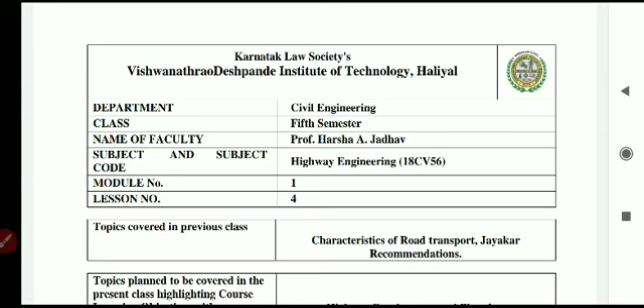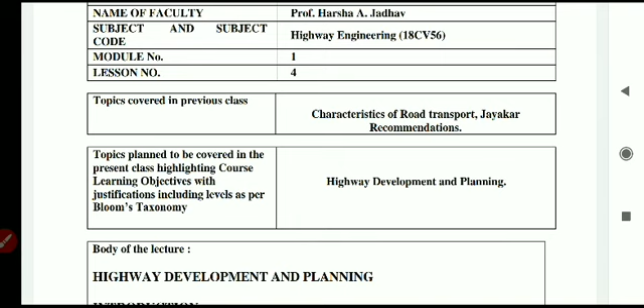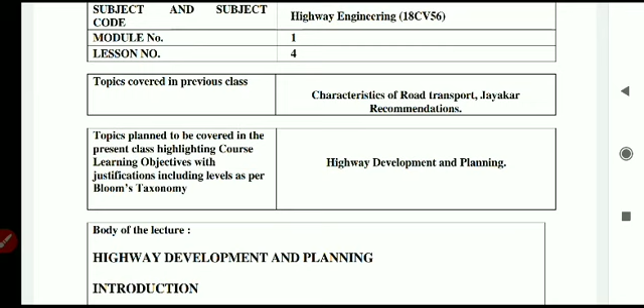Before commencing the fourth lesson, I would like to brief out whatever we discussed in lecture number 3, last class. We discussed characteristics of road transportation, about 6 to 7 characteristics. I explained door to door service is a very important characteristic which is not at all available in any other type of transportation.

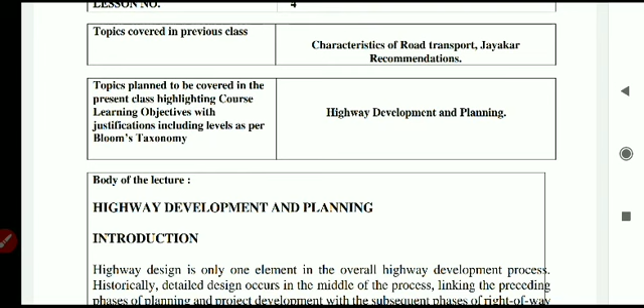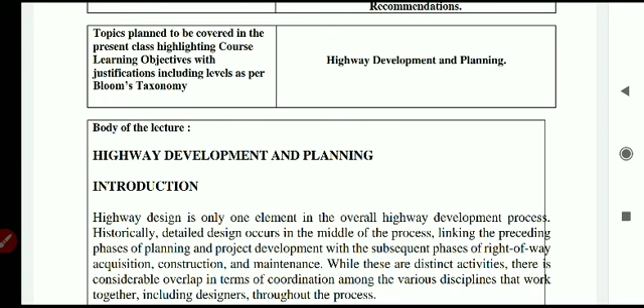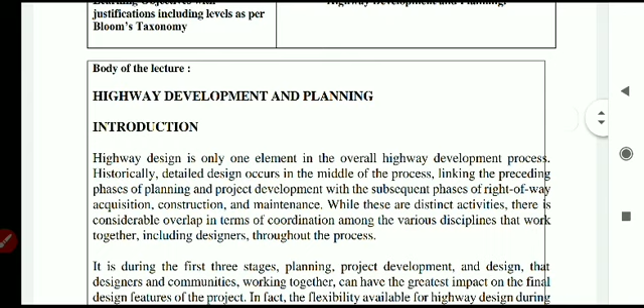Door to door service means whenever you come out from your residence, you can see the highways or roads through which your travel will start from your doorstep, and you can go till the destination. If you are visiting relatives at a distance of 50 kilometers, you can reach till the door of your relative's residence. This is only possible in road transportation, whereas if you go through railways, even though it's land transportation, there will be a fixed station to alight or board, same with airports and harbors. So the highway is the only type of transportation which can give door to door service.

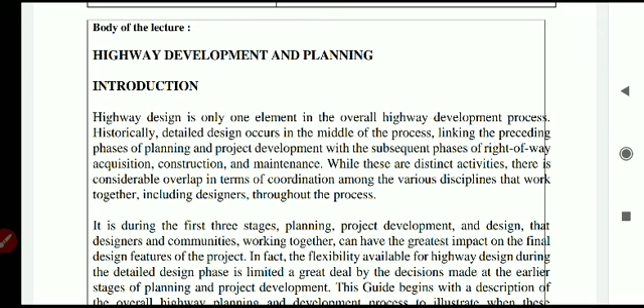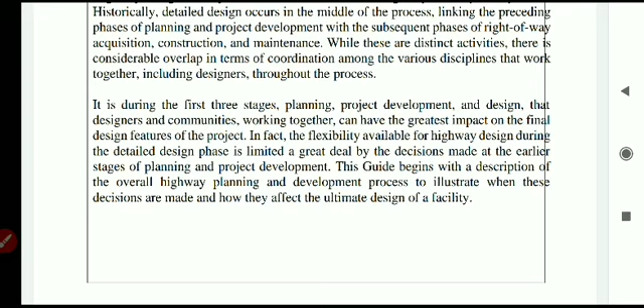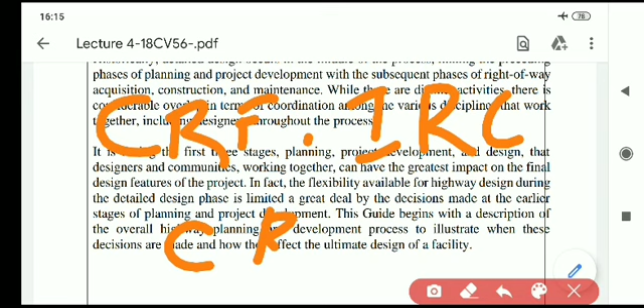After that we discussed Jayakar committee recommendations. In that, highway development or construction is going to deal with national interest. Next, tax is collected on petrol for construction purposes, as a reserve amount. After that, IRC, a semi-official technical body, is introduced to pull out the technical aspects. Last one is CRRI, Central Road Research Institute, to check quality of material, situated at New Delhi. These recommendations are implemented in terms of CRF, Central Road Fund, established in 1929; IRC, Indian Road Congress, in 1934; and CRRI, Central Road Research Institute, in 1950 at New Delhi.

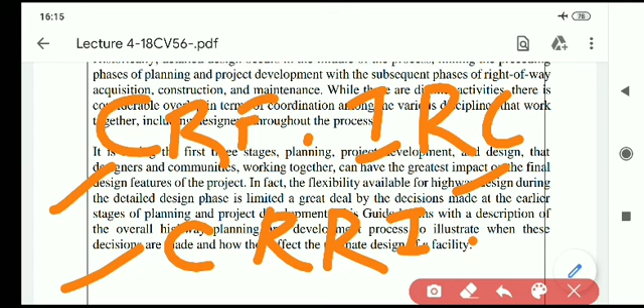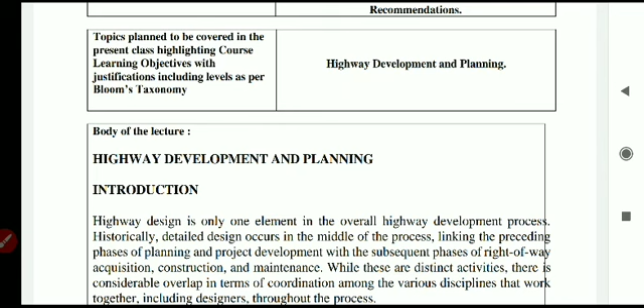After discussing the last class concept, now we'll focus on the fourth lecture, about highway development and planning. So far we discussed the concepts or introductory parts of highway engineering, then Jayakar committee. Now a very important concept, highway development and planning. In order to start construction of highways, what all tasks and steps should be followed, that we are going to study.

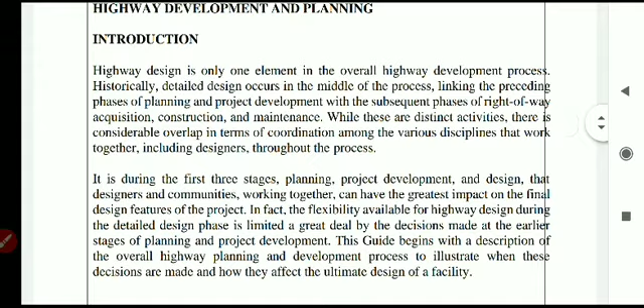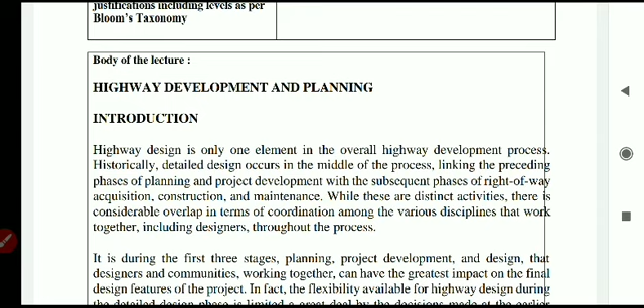In highway development and planning, there is a step by step procedure. Our aim is to construct a road just to provide connectivity between origin and destination, or between two important places. But construction is the last task. Before construction, many more tasks are there, like planning, development, design, acquisition of land, and at last choosing the material and constructing the roads, then allowing it to traffic operation, that is opening the road for traffic. So the ultimate conclusion of development and planning is construction of the road, but before that we have many phases which we will study here.

The first task is highway planning. Whenever we need to construct a road between any points, origin and destination, first we need to plan it properly, like what type of road should be constructed, from which point to which point it should be constructed. After that, project development task should be done. It consists of a set of people, and alternatives are considered in the project development process. If your origin to destination is from A to B, we can choose different alternatives with different materials and different concepts. So first is planning, next is project development.

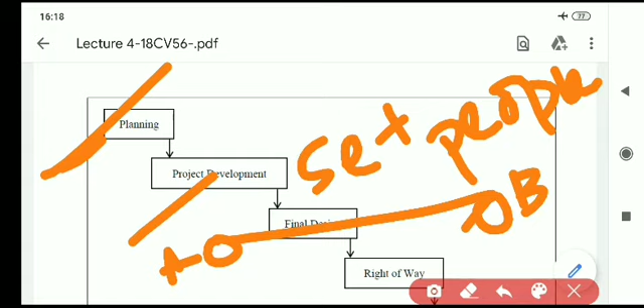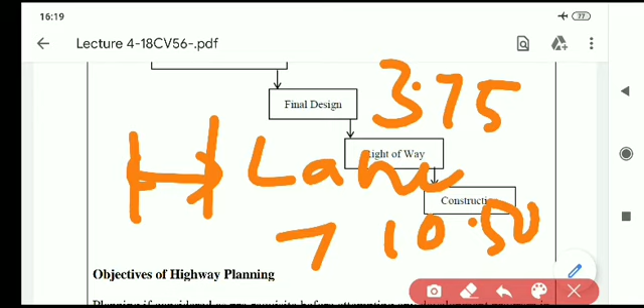After that we'll go for final design. During construction of the road, the width should be decided, length will be standard as per origin to destination distance, whatever it is. But width of the road mainly depends upon number of lanes. If it is 2 lane, it is 7 meters. If it is 1 lane, it is 3.75 meters. If it is 3 lane, it is 10.50 meters. So the number of lanes will decide the width of the road.

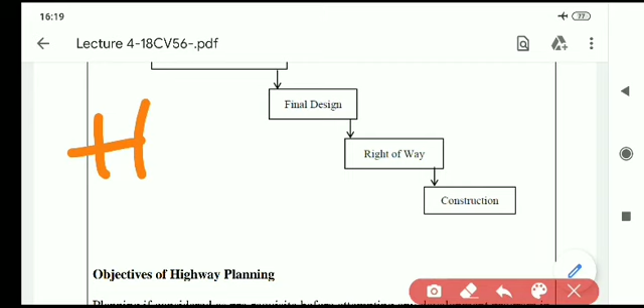Then when it is a design, the design may be in terms of horizontal curve, or it may be in terms of vertical curve. We have two types of curves. One is horizontal curve, the other one is vertical curve. If you are designing the curves, that is nothing but a highway design.

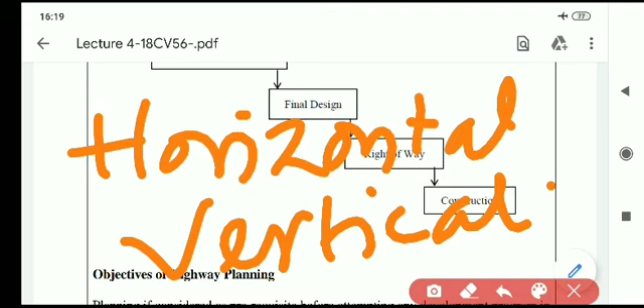If you are designing SSD, that is stopping sight distance, and OSD, that is overtaking sight distance, even this is also a geometric design, but it is a design in the part of construction of the highways.

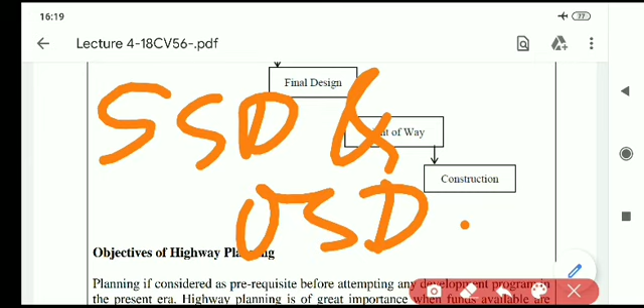Next comes right of way. What do you mean by right of way, ROW? In order to construct a road, we need to encroach much more land. If we are constructing a 2-lane road, the width of the 2 lanes will usually be 7 to 7.5 meters. But keeping the future development or growth in consideration, we need to encroach the land

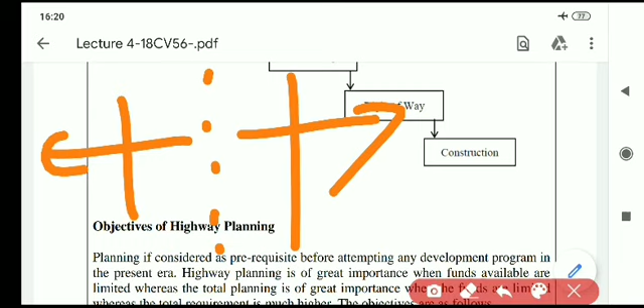more than 7.5 meters. We have standard charts for encroachment of the land, that is ROW, for national highway, state highway, major district road, other district road, and village road. Based upon that, from the center of the road we will encroach the land, so that is called right of way. This width will be more than the width of the road.

For example, if you are constructing a 7-meter national highway, then from the center it is 3.5 meters on the left hand side, and on the right hand side also it is 3.5 meters.

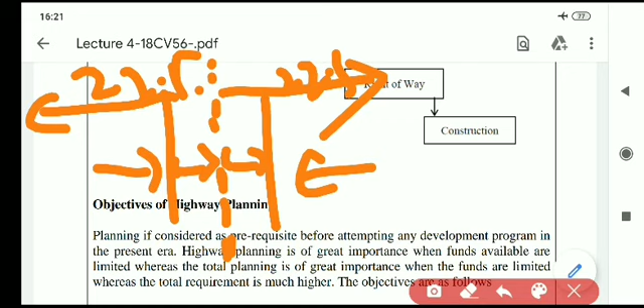But in right of way, we need to encroach a total land width of 45 meters, that is 22.5 meters and 22.5 meters. This is keeping the future consideration. This is called right of way. This right of way has a very important role in highway development and planning, so it is given the fourth important position here.

Next, after encroaching the land, all the materials will be tested in the laboratory. As I told earlier, CRRI, the Central Road Research Institute, was the only laboratory to test the materials. Nowadays you can see many more laboratories in many places. Even all engineering colleges have a material testing laboratory in the Department of Civil Engineering.

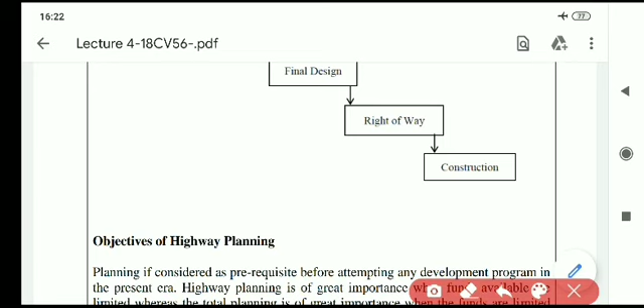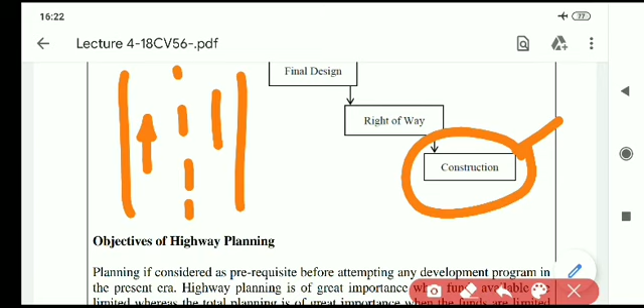After checking the material quality, when the results for that material are within the permissible limit as recommended by IRC, those materials will be chosen for construction work. After the construction, the road will be allowed for traffic. Till here, this comes under highway development and planning.

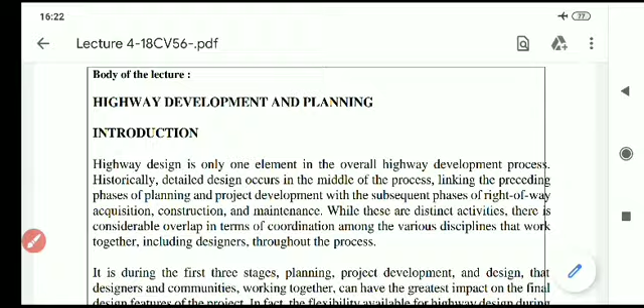Understood? I'll repeat again, under highway development and planning, we have 5 steps. First, we need to plan the road: what type of road, what length, what category, and where we are constructing. Project development is the next level of planning. It consists of a group of people deciding what should be done, how to take up and distribute the tasks, and how the survey should be carried out.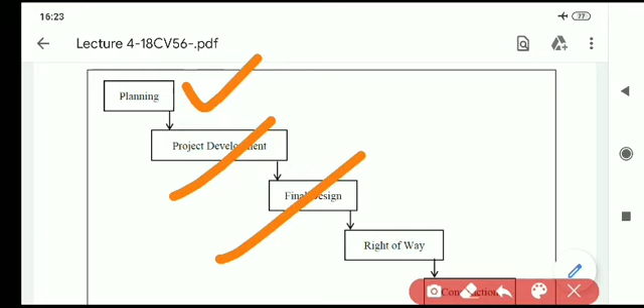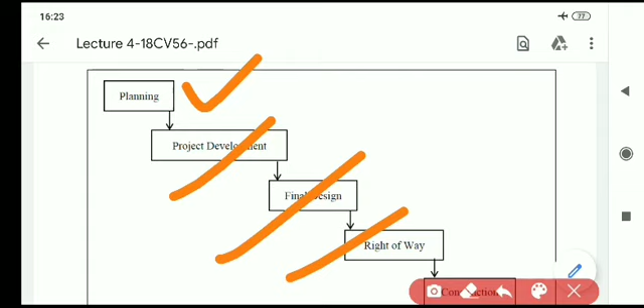Next comes final design, all the design considerations and design parts in the construction or planning of highways are done at the third stage, final design. It is the ultimate design, no corrections will be there. Next, after designing we will choose the land and encroach extra width of land beyond what is prescribed for the highway, that is called ROW, right of way.

The last one is, after doing everything, we'll get the material, test it, dump it on the site and start the construction, that is the construction part. These 5 methods are very important in highway development and planning. Many more methods are there, but all the steps are included in these, so it is split into 5 parts.

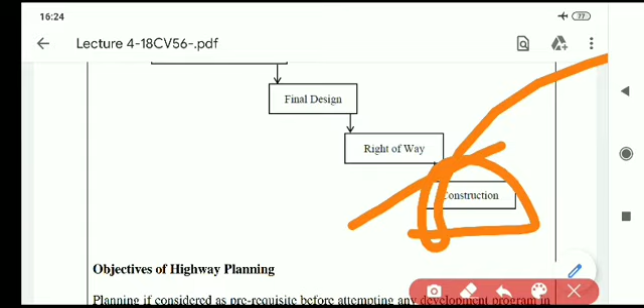Next comes the meaning of highway and road. We'll focus first on road. Road is a thoroughfare, route or way on the land between two places, which typically has been paved or otherwise improved to allow travel by some conveyance, including a horse, cart or motor vehicle. In general, road is a route between two places to travel by motorized or non-motorized vehicle. Then we'll focus on what is meant by highway.

Highway is a public road, especially a major road. Major road means the quality of the work will be good; the type of the road, condition of the road and condition of the surface will be good. So it is a major road connecting two or more destinations. Any interconnected set of highways can be variously referred to as a highway system, a highway network or a highway transportation system. Each country has its own national highway system.

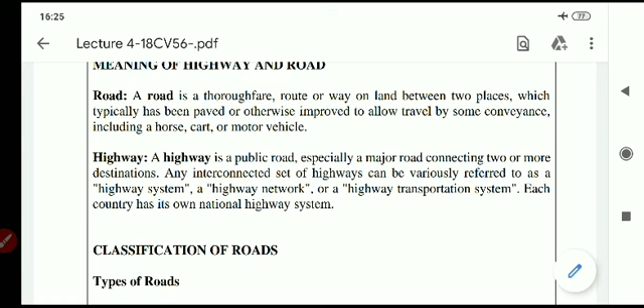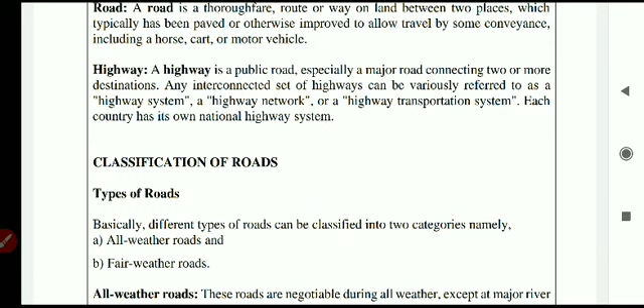National highway is nothing but also a route between places, but the quality and the purpose is different here. The road may be paved or in good condition; for a highway, specific material should be used, the condition is specified and all the facilities are given properly. That is a highway. But the function of both is to allow vehicles to travel from one place to the other.

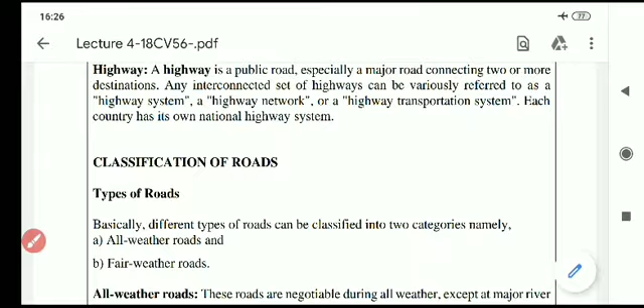So after studying this we'll go for the classification of roads, types of road. Based upon weather condition, roads are classified as all weather roads and fair weather roads. All weather road is operated all the 3 seasons for all weather conditions. Fair weather road is operated for 2 seasons, not during the monsoon.

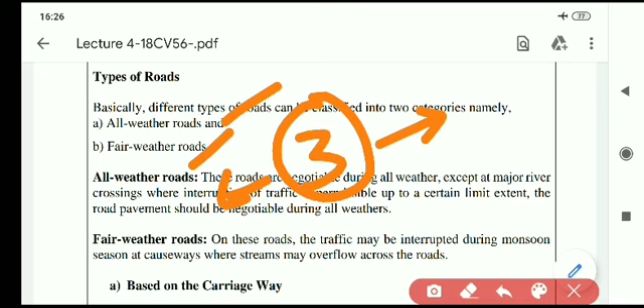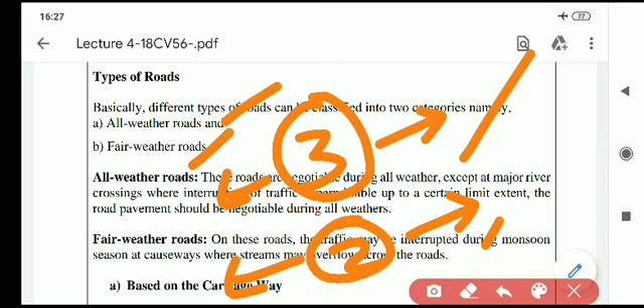Because of overflow of the water, these roads will not be used. This is called fair weather roads. All weather roads are used in all 3 seasons, 365 days; fair weather roads are used for only 2 seasons. Whenever the monsoon is there, the road may be used as a causeway, meaning water will run on it and pass from one side of the road to the other. During that time, that particular road will not be utilized for transportation purposes.

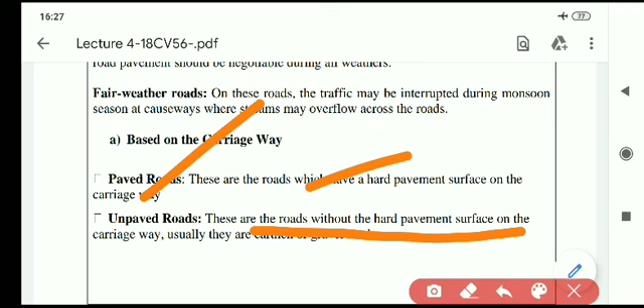Next comes based on the carriageway. Based on the carriageway, roads are divided into paved roads and unpaved roads. Paved roads are those roads which have a hard pavement surface. Unpaved roads are those without a hard pavement surface. If the road is provided with a hard surface, it is a paved road. If it is not provided with a hard surface, that is called an unpaved road.

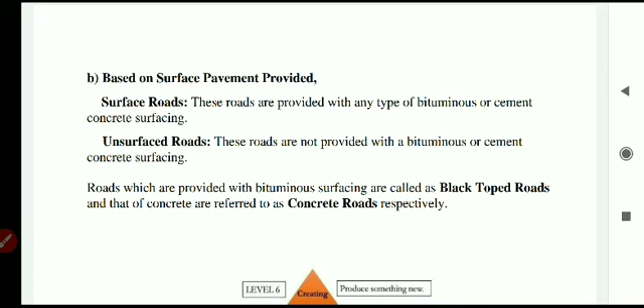Next comes based on the surface pavement provided. Based upon the surface, the road is divided into 2 types: surfaced roads and unsurfaced roads. Surfaced roads are provided with bituminous or cement concrete surfaces. This surface may be constructed with bituminous material or with cement concrete surfacing.

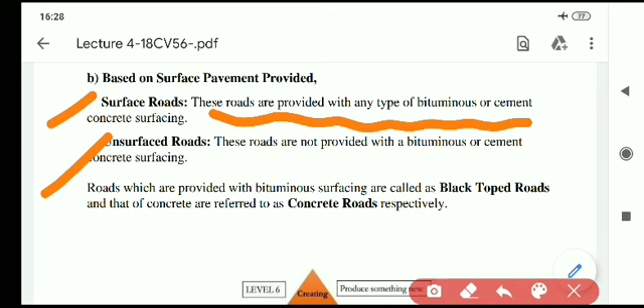Unsurfaced roads are those provided without bituminous or cement concrete surfacing. Another type of surface will be there; it may be WMM, WBM or murum. Such roads are never treated as surfaced roads; they are always treated as unsurfaced roads. Black topped road is nothing but a bituminous road. This is the classification of roads based upon surface condition.

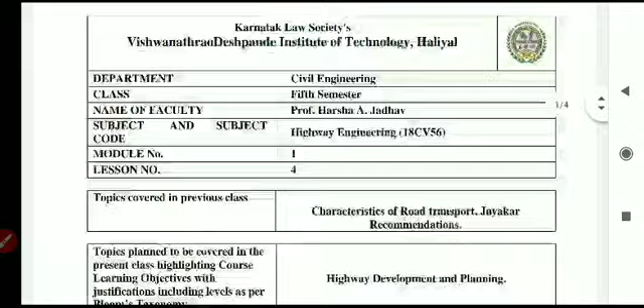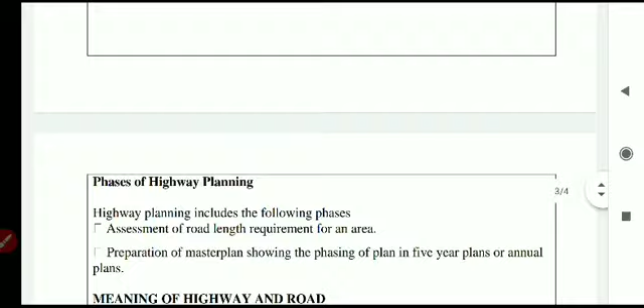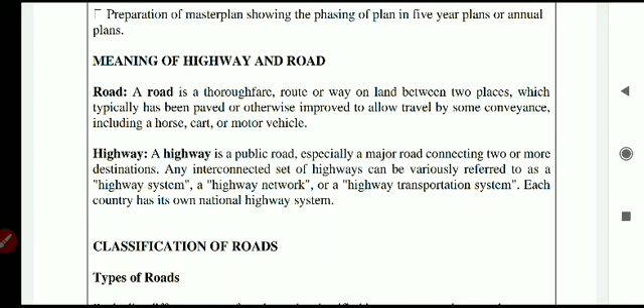So in today's class we discussed highway development and planning. In that we discussed the 5 steps: planning process, project development, final design, right of way, construction. Next we discussed the meaning of road and highway. Road is a way which connects two places. Highway is a very important category of road made for the public, constructed with good specification and good material.

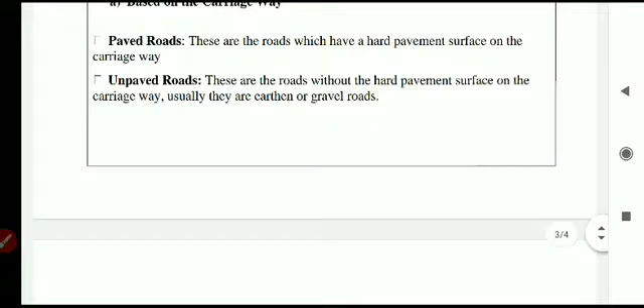Classification of roads is done based upon weather condition, that is all weather road and fair weather road; based upon pavement condition, that is paved roads and unpaved roads; and lastly based upon surface condition, that is surfaced roads and unsurfaced roads.

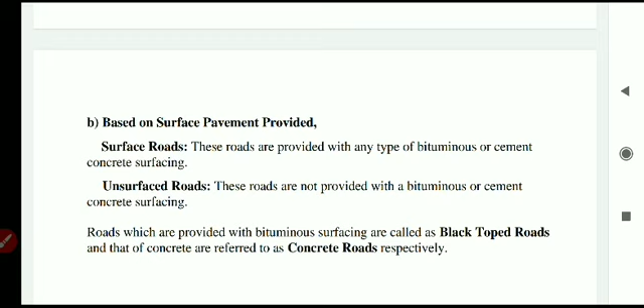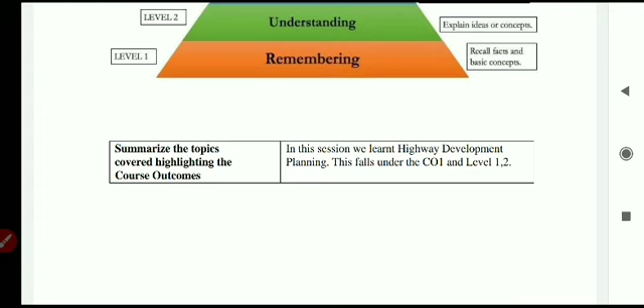So friends, this is lecture number 4. Whatever we discussed in today's class, highway development and planning, this overall concept lies under CO1, and in Bloom's taxonomy it lies under level 1 and level 2. That is, we remembered the concept and we understood the concept. When we recall the concept, that is level 1 in Bloom's taxonomy, and after recalling, understanding the concept lies under level 2. So only these two levels we covered in lecture number 4, which is under CO1.